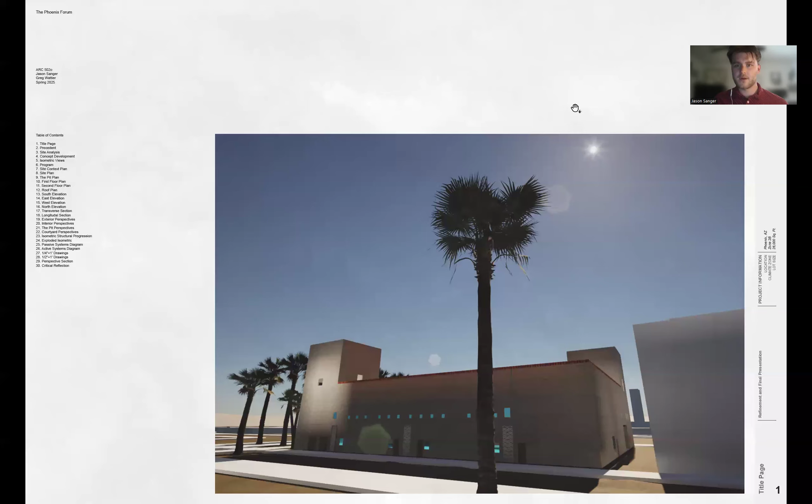Starting off, I did a precedent study on the ARC building at the Green School in Bali, Indonesia. This building is used for recreational use, as well as other things, such as presentations or just gathering of students.

This reminded me of my visit to Japan on a study abroad last year to the Kanagawa Institute of Technology. They have a plaza called Cape Plaza that is intended just for students to come and gather and take a break from school. That is something I really wanted to integrate into my design.

This is something I modeled off of the school I went to in high school. It was a supplemental school where I would go to high school in the morning and then that school in the afternoon, and adults 18 and older could pay a tuition fee for trade school. I noticed a big need for that in the Phoenix area, so this is something I've gone for.

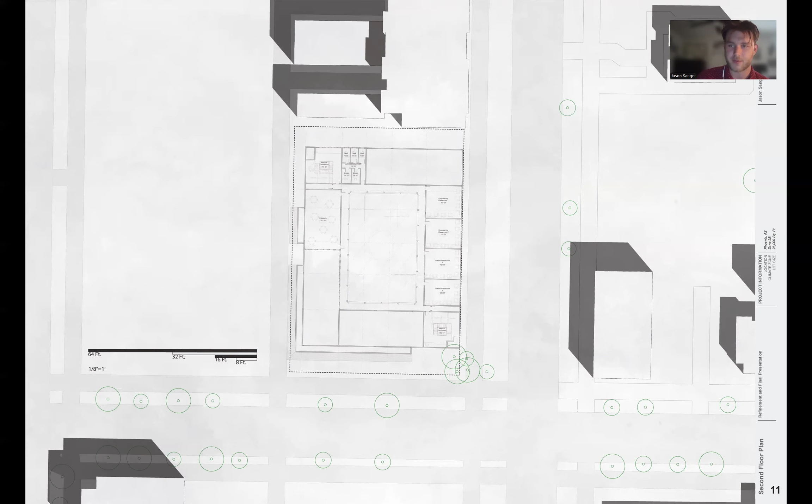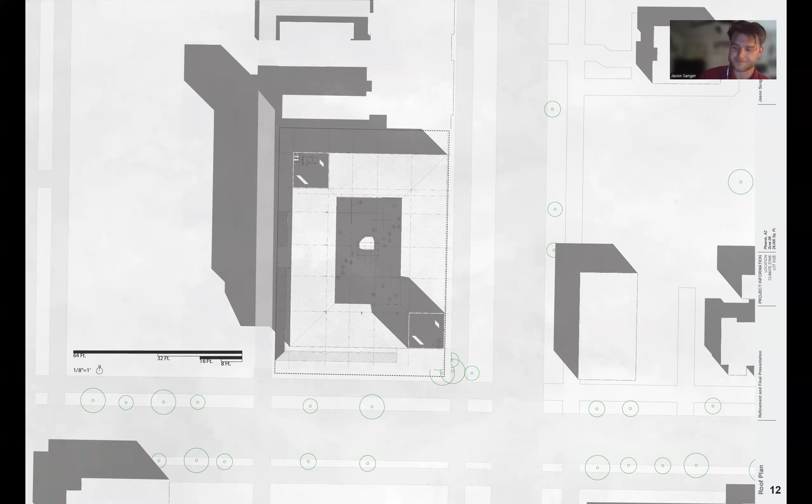Here we have the roof plan showing the HVAC going on the roof in the towers. The towers I designed after a native Puebloan architectural style. And here in the center, there's this ovular shape based on a Hohokam Native American mound - that's the main bathroom for the building.

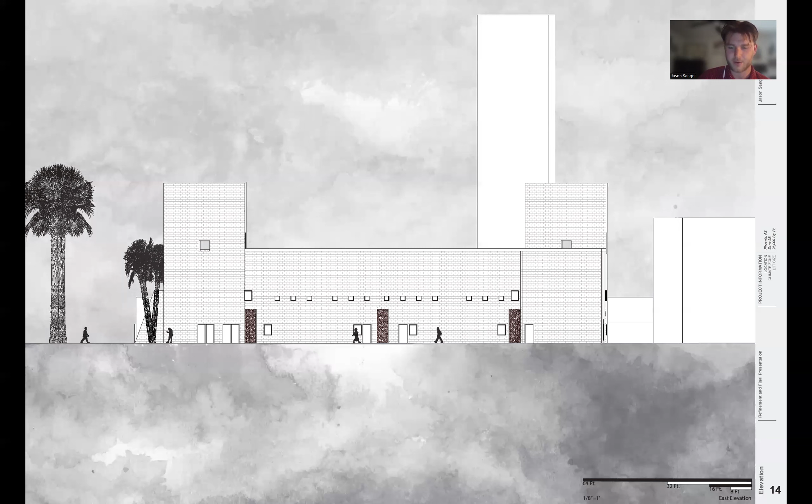The barrier I used was modeled off of a pattern on the Hohokam Native American mound that I'd studied.

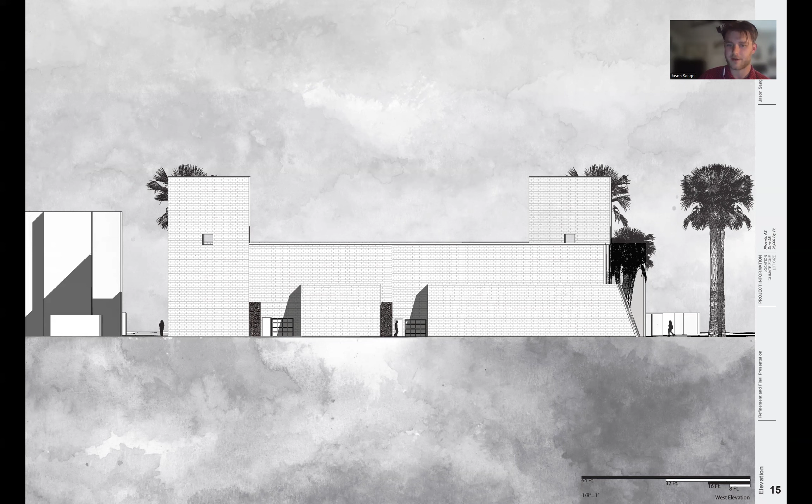Here we have the west side, again showcasing that solar chimney and showing the garage doors to the loading room as well as the manufacturing floor, so students can drive up the alley and drop off their large heavy materials so they don't have to carry it all the way through the building.

Then here we have the north side. This is where the majority of traffic is intended to drive through to drop people off, so school buses and cars, parents dropping their students off, can enter through this open part of the building.

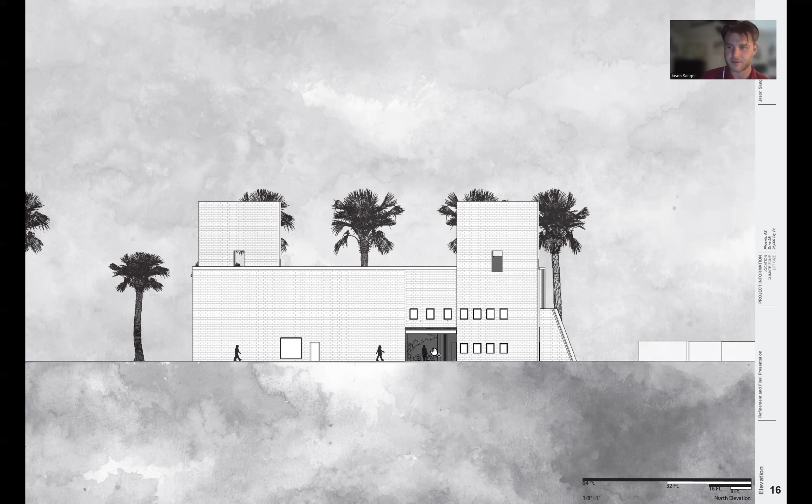Here again we have that pit space at the bottom. On the left we have the design market, intending for artists to come showcase their work. Students can see it, the public can come see it. It can be a gathering space to learn about art, to connect art with the trades and with engineering. School is something I see as important, something I haven't really seen before.

Then here on the right we have the showcase and presentation space where students can present their projects, where people can come to showcase their work, stuff like that.

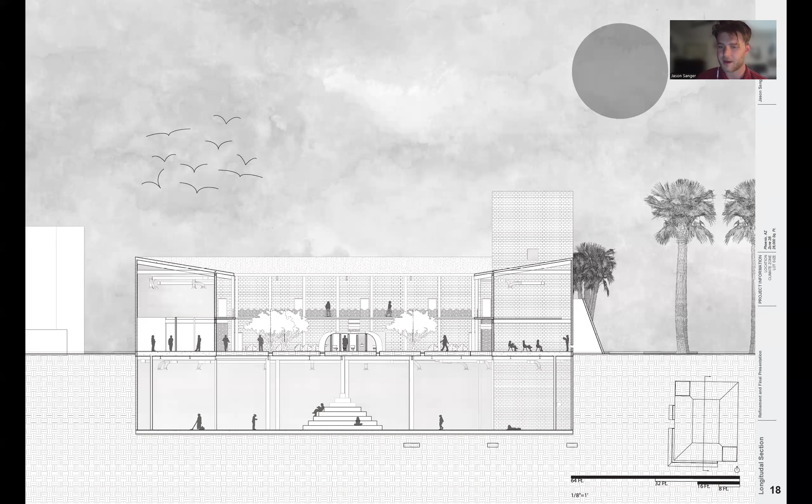Then we can see the solar chimney there, and there's a little vent where air can be pulled through. There's another vent, which unfortunately isn't shown, but it pulls in cooler air from the courtyard through the space, and then the hot air is expelled up out of that chimney.

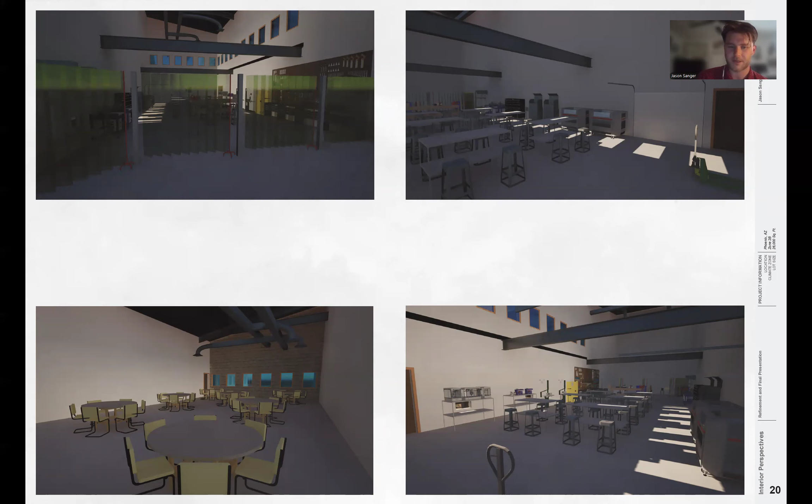Here's some interior perspectives, three of which are of the manufacturing space, and the bottom left is of the cafeteria space. Then here we have perspectives of the pit.

Then here we have some perspectives of the courtyard. The slits are skylights with pools on top of them, allowing the light that we just saw in the pit to shine down and get some natural light into the basement. And we have some native plants here.

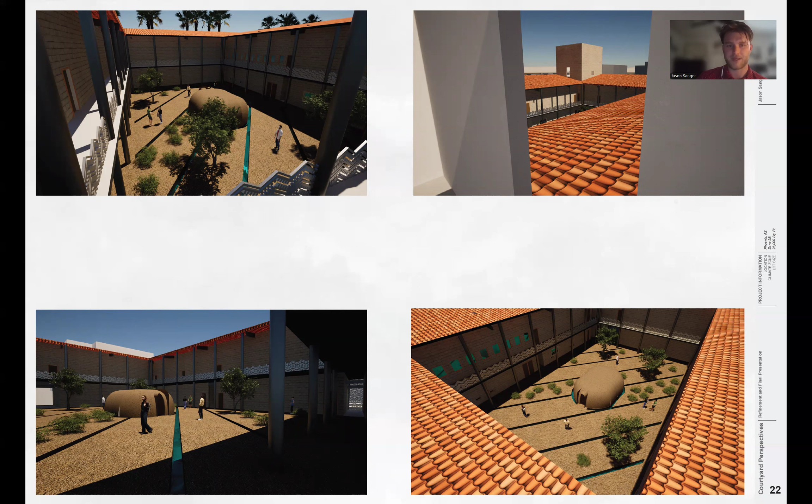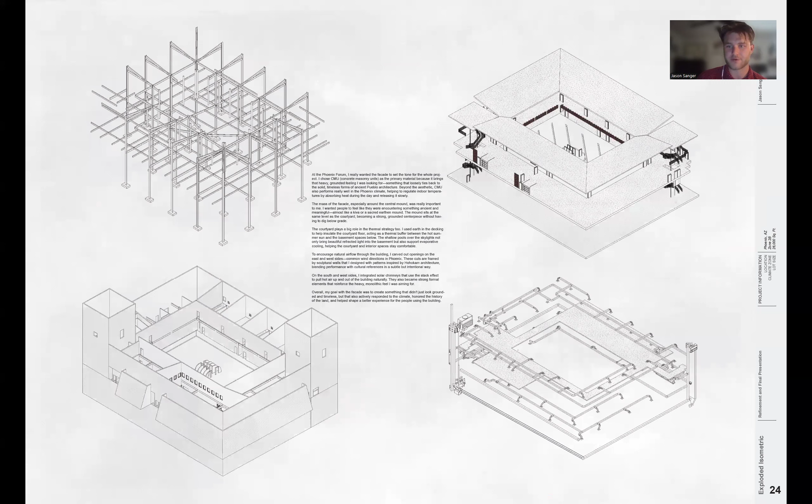Here we have the structure. I went with a steel framing system with concrete slabs that are cast in place over steel decking. This allowed me to do what I wanted to with my design, as well as I have two masonry structural towers. Then here we have an exploded isometric showing the structure, the walls, the floors and the roof, and the HVAC system.